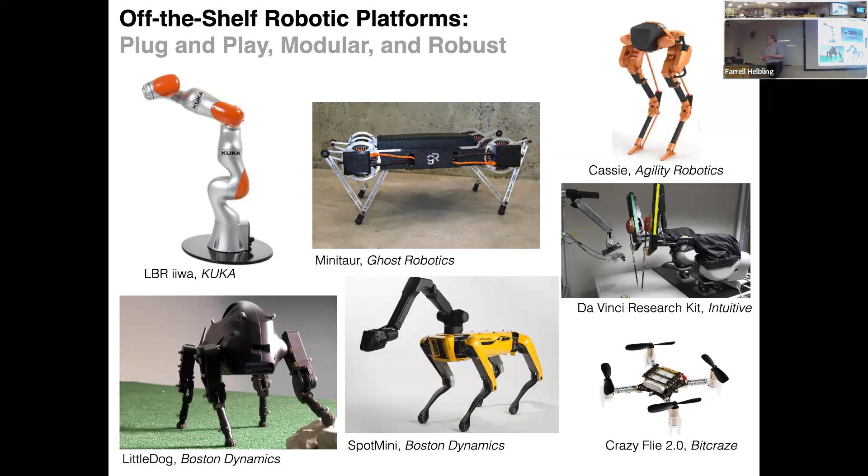What people have been doing for a number of years is looking at different locomotion strategies. If I do a 4-wing vehicle versus a 2-wing vehicle, how does that affect my locomotion? If I think about different actuation strategies, ionic propulsion versus low voltage electromagnetic, what are the implications for my power system design? You have to look at the entire stack when you're building something so small. Every single milligram that you put on these platforms is basically a question of, are you going to be able to fly or not?

So I build autonomous micro-robotic platforms that span a lot of different areas, some of which I cover, some of which I do not.

Some of the main things that I think about in my lab are micro and mesoscale manufacturing. How do we actually build the articulated mechanisms necessary to either flap our wings or move our legs? How can we think about power storage and amplification? I'll spend a lot of time talking about some of the power system design that I did to make RoboBee untethered.

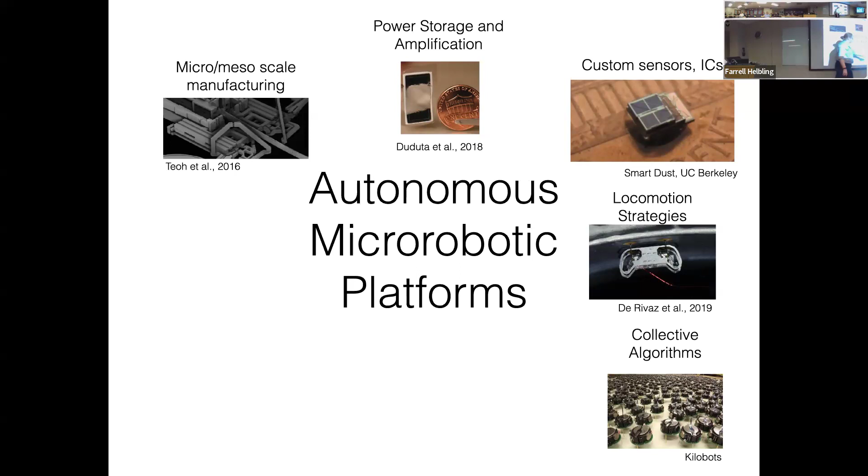We can also use them as platforms for biological study, because you don't really want to put a bee inside of a tube and spin it around many times. What can we actually learn from some of these small scale systems?

We also do things with planning and estimation. How can you do it on a very low compute platform where you don't have an operating system? We don't have ROS on board. Everything I'm doing, I'm programming in C on a very small microelectronic microcontroller. And then finally thinking about system level optimization, because again, every milligram that I put on board is either going to determine, am I going to fly or not.

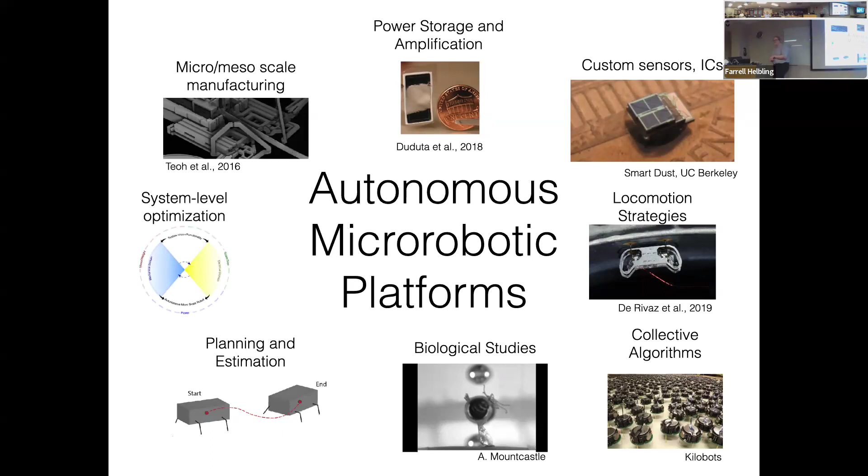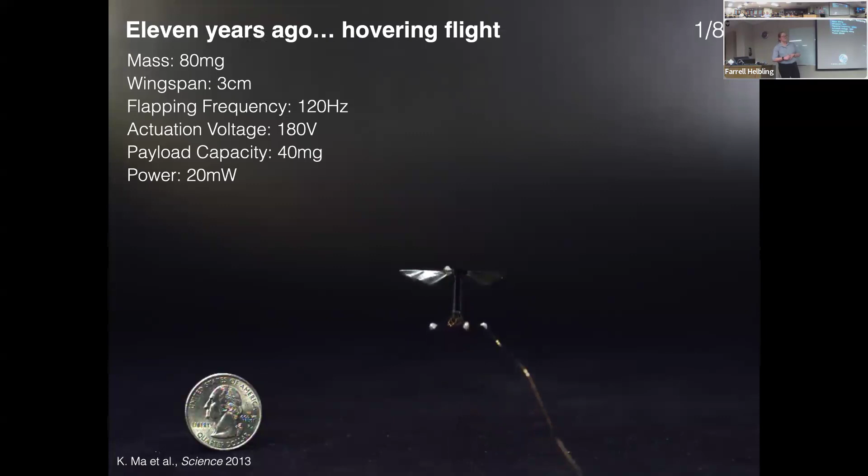So when I first joined Rob Wood's group at Harvard, they had just achieved hovering flight - this was 11 years ago. They had the RoboBee platform. Sorry, the video looks better over there than it does here.

But this tiny vehicle is 80 milligrams. In terms of scale, it takes about 32 of them to weigh a penny inside of your hand. It's a very lightweight vehicle. Back in 2013, it had a total payload capacity of about 40 milligrams, so you're thinking about like one 3-millimeter IMU that you can put on there and nothing else. This guy has a wingspan of about 3 centimeters. You can make the wings smaller and just flap it at a higher frequency, so I don't really like thinking about it in terms of that type of size scale.

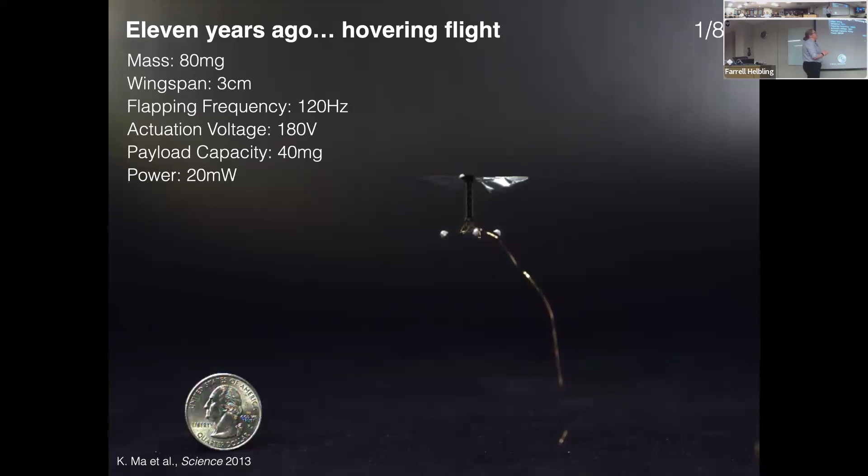For actuation, it flaps at about 180 volts and it consumes about 20 milliwatts of power - that's just the actuator, nothing else on board. This system is tethered.

What kind of sensors can I put on board the vehicle to allow it to sense different states? How can I change the design of the vehicle to carry more payload capacity without also increasing the amount of power that it was consuming? There was a lot of work that went on between the very first generation of the Bee to what we called Big Bee, and then we have RoboBee X-Wing, which I will talk about later in this talk.

And then different power strategies as well. So either thinking about custom battery solutions, off-the-shelf solar cells that we can buy pretty cheaply, and then step-up converters.

I'm going to talk a little bit about the sensing work that I did, but for the sake of time, I'm not going to spend too much time on that area. I'll get pretty in depth into power because that paper came out in 2019 and then we had a pandemic, and so I don't get to talk about it very often. So I'm going to talk a little bit about that as well. And then I'm going to get into some really cool and interesting locomotion strategies and opportunities that we can do at this scale.

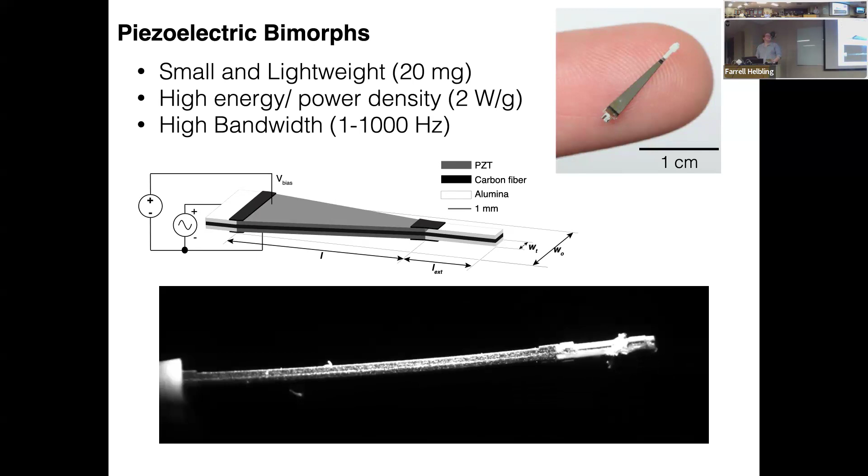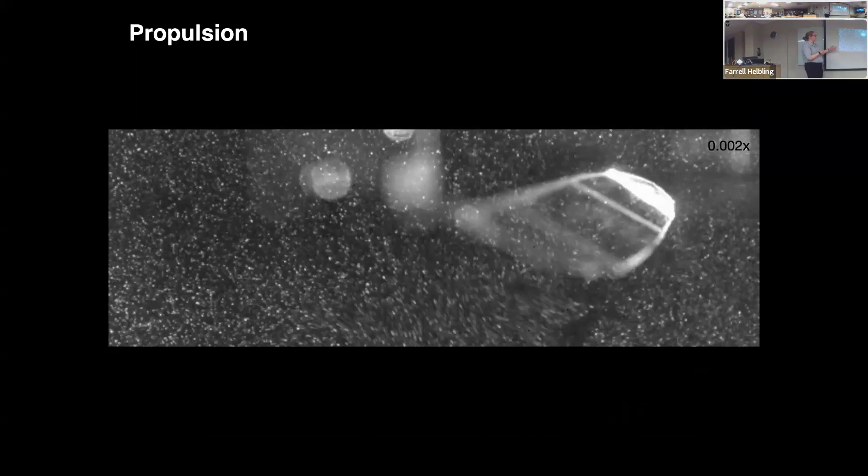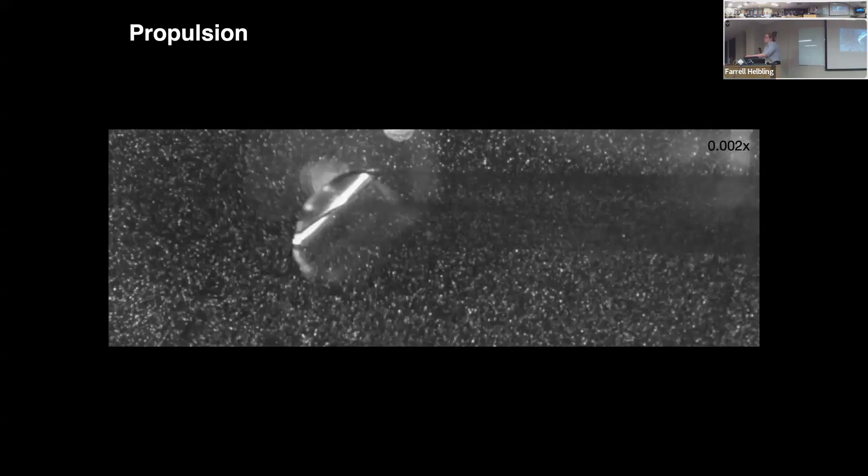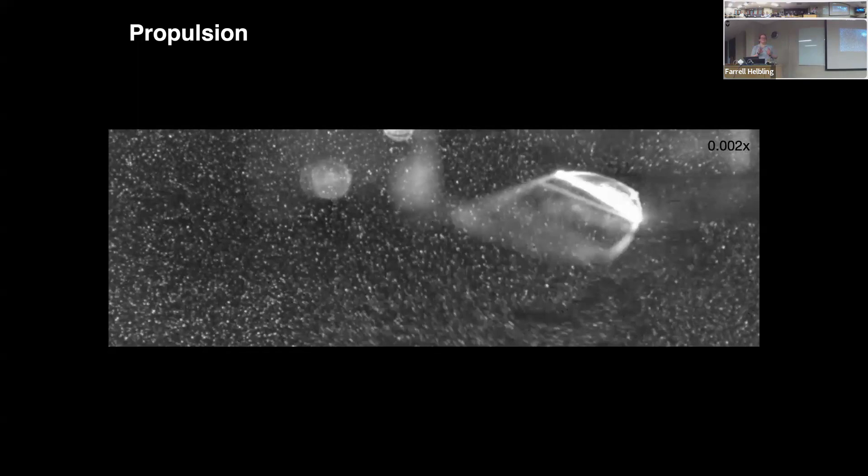We then did a lot to study the propulsion strategies. So what are the different wing sizes, the wing shapes that we need to actually generate the vortices, shed them, and generate the lift capacity for the vehicle. A lot of work went into the vehicle design to actually increase our overall payload capacity. You can make improvements in the wings, but the overall benefit of wing improvement is significantly smaller than changes to your actuator, et cetera.

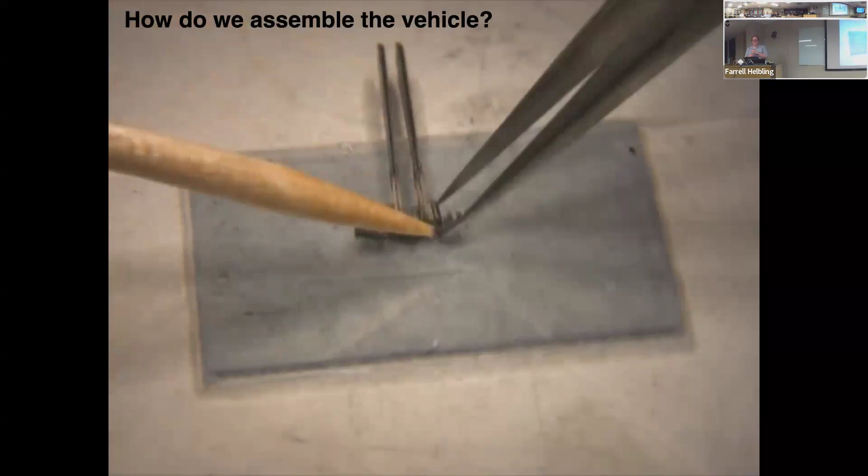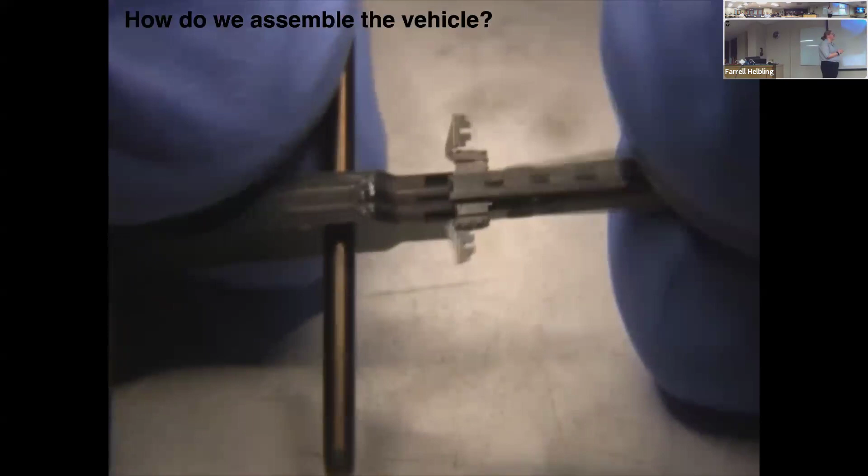Okay, my favorite part is actually assembling the vehicle. We do this under a microscope with tweezers and glue. My students hate it, and that's okay because I will do it, or I will at least step in while they're trying to learn this process. Some of these things we can combine.

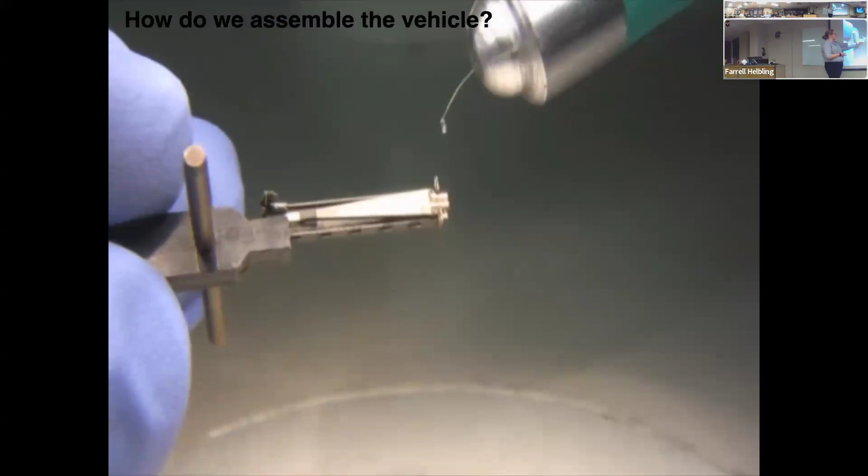So there is the pop-up book method that was developed in Rob's lab in 2012, but while we're iterating through different designs, I kind of like having it more modular. When you're building a pop-up, a lot of things have to be pre-designed inside the scaffold, and so you actually can't swap things out as easily. So everything is done under a microscope using tweezers, and then we apply very fine coats of glue and epoxy to make sure that everything stays exactly where it needs to.

Once this is assembled, we then test it. As I said, each wing is powered by a single actuator, so we can flap them at different frequencies. We very rarely do this. We can flap them at different amplitudes. And in this way, we can generate the torques necessary to controllably fly.

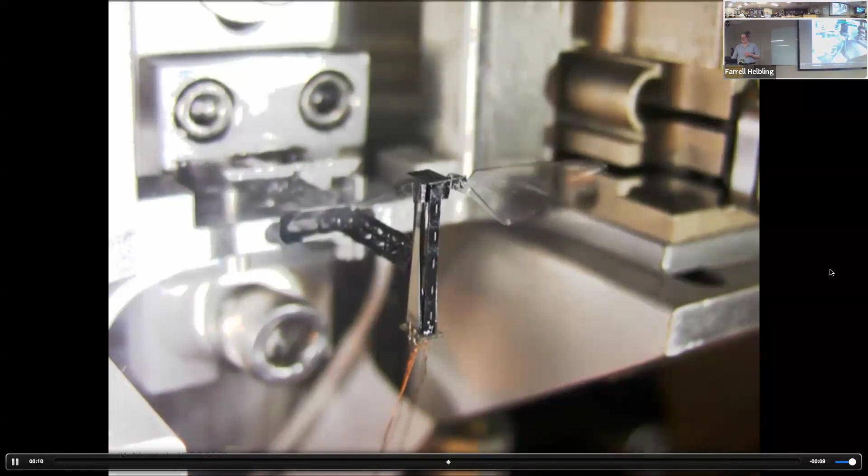Do you need me to admit this person in the waiting room? No, no. Perfect. I think I got rid of it. Don't know how to get rid of this though, guys. I'm sorry. That thing is going to live.

So how do we actually control the motion of the vehicle? Like I said, we can vary the frequency and we can also vary the amplitude that is provided to each wing. Okay, so in order to control pitch dynamics, we just change the mean position of the wing either forward or backward, and that just tips my body forward or back. Like even as I'm telling you this, right? My body naturally wants to move forward or backward. Roll, we just flap one wing at a larger amplitude than the other.

That causes asymmetric forces. Yaw control, you actually can't do this at resonance. You have to move further away from resonance. Resonance will actually filter out this split-cycle signal. But what you do is you just flap one wing forward faster than the downbeat, and then on the opposite side, you do the opposite. So you would flap up very slowly and then quickly on the backside. You can do this in a pool if you are just hanging out in a pool and you want to spin around really fast, test it out. It actually works. But again, this can't happen around resonance. This is a second order effect, which gets filtered out by our system.

Do you know if actual bees flap at resonance? Oh, that's an interesting question. I'm not sure. I mean, there would be a lot of energy savings around flapping at resonance, so I imagine they would want to. But I don't know. They also don't necessarily have the same type of flapping control here. They have one big power muscle and then small control actuators on the side to change the angle of attack of the wings. We can do that. It's just significantly more complex to build and not as repeatable.

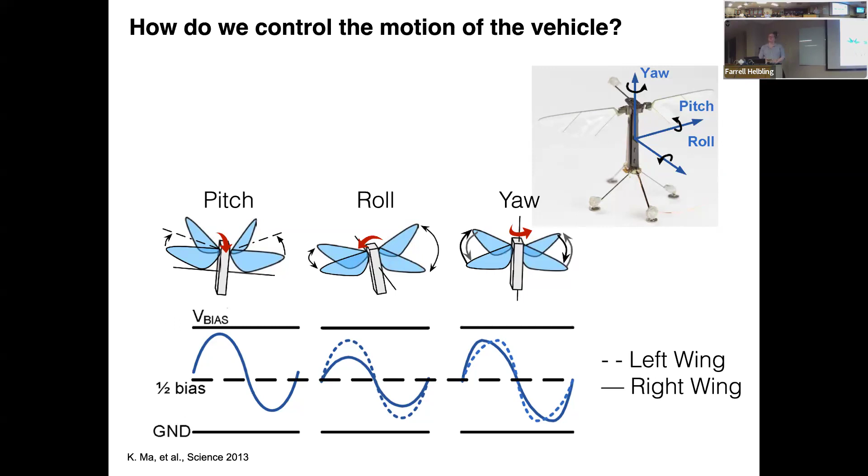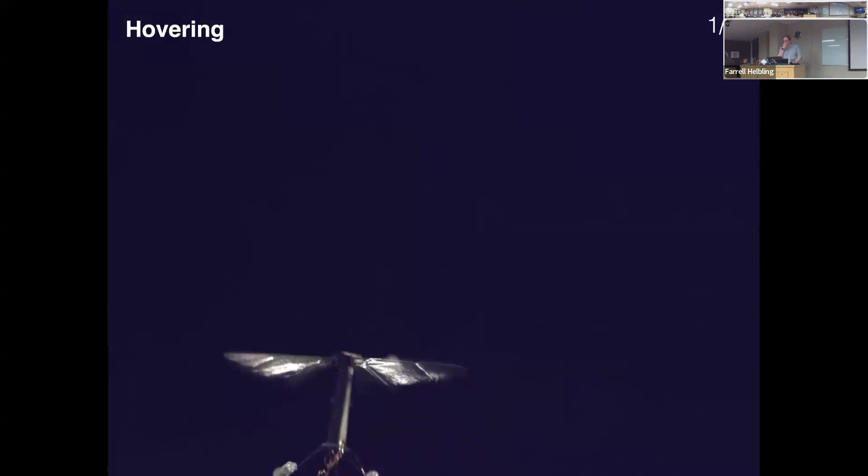Okay, so we build it, but because everything is built by hand, you have all these open loop effects where it's just gonna crash into the ground, okay? And so we keep trying to tune the parameters until we get that kind of straight up and down flight. At that point, we're kind of like, okay, we've tuned out all of our biases. Once we have that, we wrap a controller around it.

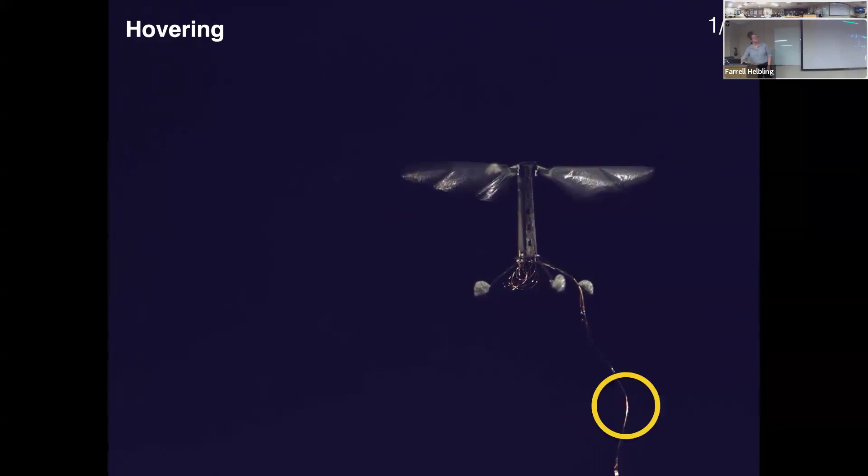So again, we have these motion capture markers that are constantly tracking the position and orientation of the vehicle. And then we have this onboard tether here, which is sending control signals and also power to the actuators, okay? So all of this is still trapped inside the motion capture.

Do the motion capture tags have any significant drag in the system? Does the tether have drag? Do the tags make any drag? Oh, no. And the tether, honestly, I think would probably have more of an effect. But we did a lot of studies where we actually just kind of dragged the tether under the vehicle, and so the controller can kind of compensate for it. But it would be another thing that I don't have to worry about if it was autonomous.

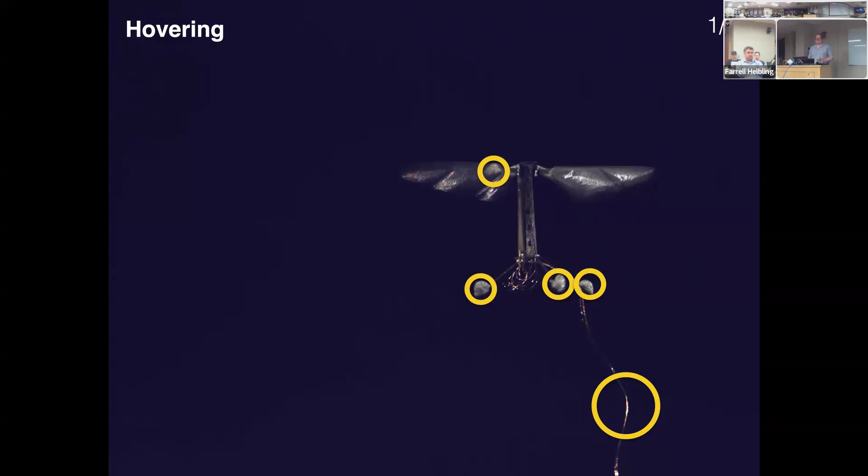Question about that. So the time constants here must be tiny, and so I imagine latency in your sensing, or even the frame rate of your sensing, are pretty important. What were those approximately? So the Vicon system is somewhere around 500 hertz and it has about 20 millisecond latency, which is not excellent, but it was perfectly adequate for some of the control work that we were doing here.

The sensors that I can buy off the shelf are providing feedback significantly faster than what my Vicon cameras can do. Obviously, they're not going to be as precise, and so they're going to start accumulating error, and that's something that I had to deal with.

But you can do control at 20 milliseconds of lag? Yeah. You absolutely can, especially for something like hovering where you just want to stay in place. And then if we want to do any type of fast movement through the environment, we split it into multiple hovering waypoints where it's just hover, hover, hover, and then it just moves into that position, either by pitching or rolling.

Okay, so everything exists inside of this motion capture arena. And then just for scale, this is the bee down here. This is actually an image from the Vicon arena that I had during my PhD, but I built an exact identical version at Cornell, so the images would look exactly the same. I just didn't take another photo.

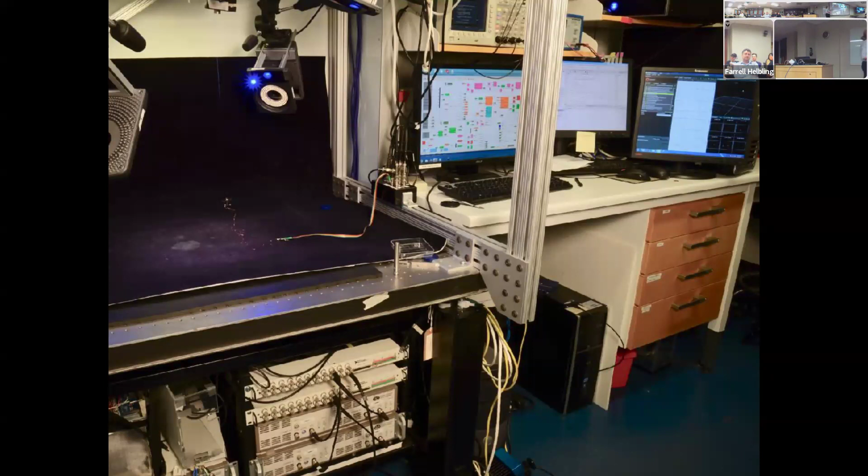Basically, this is all of the equipment that is required to fly RoboBee. And this is one of the real limiting factors of why we can't provide other people the capabilities of using it. We can step through the whole thing. So we have our motion tracking system, which is providing position and orientation information. That is being sent to this off-board controller, which is creating the actual Vicon object. It is sending position and orientation information to our control computer.

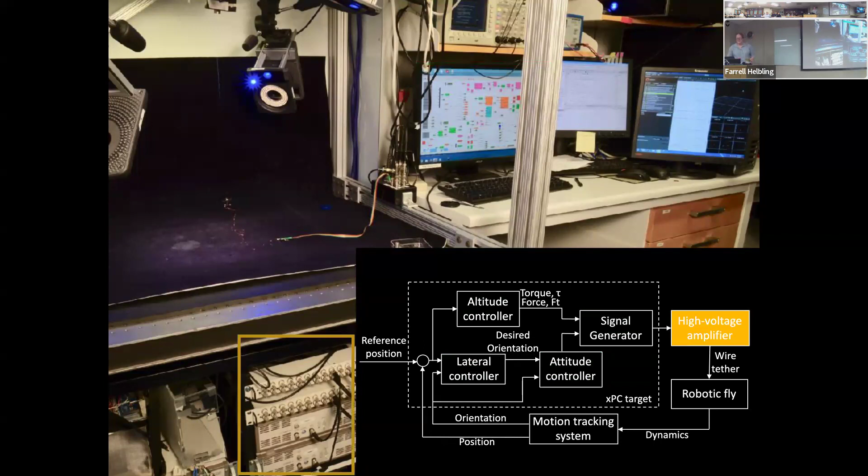Within our control computer, we have an altitude controller, a lateral controller, and an attitude controller, so we can determine our desired orientation. And then that also computes the signals that we want to send to the actuator. Again, because it's coming from the computer, it is very low voltage, somewhere between 3 and 5 volts. So everything gets stepped up through a high voltage amplification system down here to about 200 volts necessary to fly the bee. All of that gets flown directly through this very fine wire tether to the bee.

So if we actually look at some of these challenges, first we're going to think about sensing. Our current sensing system is off-board motion capture. It records 3 axes of position, 3 axes of orientation. It provides feedback at about 500 hertz. We have thought about how quickly we actually need to do this, and so we will subsample Vicon down to give us the minimum feedback necessary. But again, everything we get off the shelf is doing well more than 500 hertz, so that's okay. And a latency of about 20 milliseconds. We used to joke around and say that this is like training wheels for the RoboBee.

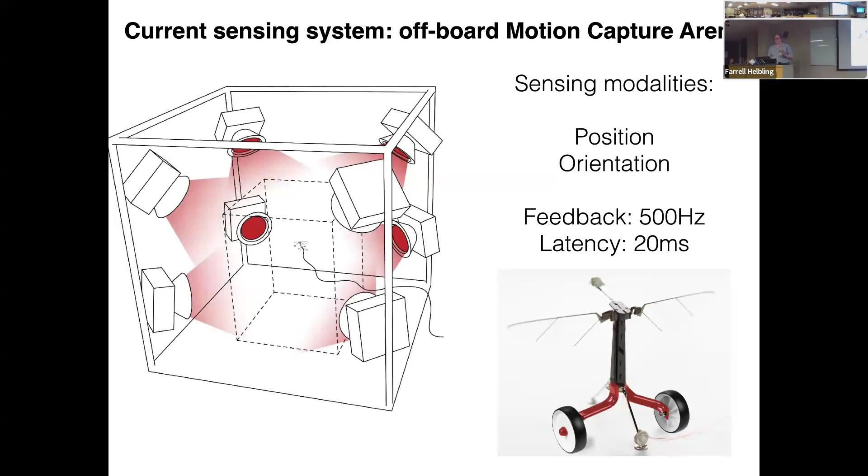So inside of our control architecture, we have our motion tracking system. With the original vehicle, what we wanted, and I don't know how to get rid of this, I'm so sorry, is a payload capacity of about 10 milligrams of sensor. We can do different sensor combinations, but we are really looking for very small sensors that we can put on board the vehicle. And the more sensory information we have, the better.

Again, the wingspan is about 3 centimeters. That is going to dictate how small of a sensor we can actually put on board. This top cap up here is about 1 millimeter by 3 millimeters. So if I even just put a 3 millimeter IMU on top, that looks like a very funny hat that sits on board. Flapping frequency is about 150 hertz, so this is going to add repetitive noise into the system. You can see it in the accelerometer and the gyroscope data that we have.

This power number is very optimistic, where we would like it to be less than 5 milliwatts, because again, RoboBee cannot carry a battery up to this point. It can carry onboard solar cells, but everything that is statically not providing propulsion is just something that is going to eat power out of our system.

Attitude bandwidth is somewhere around 100 hertz, so we can affect changes in attitude at about 100 hertz. Lateral bandwidth, significantly slower. Okay, so I can get significantly slower sensors for altitude and for lateral dynamics than I need to actually stabilize my upright orientation.

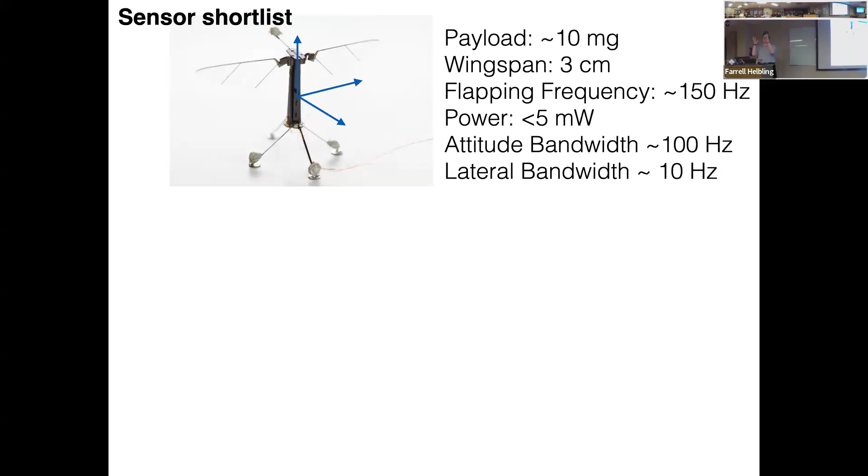So I did a sensor survey of things that we can buy off the shelf and things that we can just put on board custom. So insects use ocelli. These are light sensors. They're sun compasses that sit on top of bees. They have 3 sensors that sit in a triangular pattern. This was using 4 photodiodes, sorry, across 2 major axes. And just by measuring the difference in light intensity between these axes, you can get full orientation of the vehicle.

You can also buy off-the-shelf IMUs. You can buy magnetometers. This was, I think, the very first conference paper I worked on, and I thought I was so smart by soldering directly onto the sensor instead of putting it on a PCB. This is very silly. I don't recommend. But I think that the first conference paper you actually do, you don't realize how silly some of the stuff you're doing is. But yes, that's what I did. I thought it was very smart.

Also thought about proximity detection. So proximity sensors, you can either measure the amount of intensity that you see with your photodiode, but you also have time of flight sensing, right? Where you can measure the amount of time that it takes for a light source to come back. They both weigh approximately the same amount. They're about 20 milligrams. Optic flow is just a very low resolution camera that is detecting the velocity of known patterns in the environment.

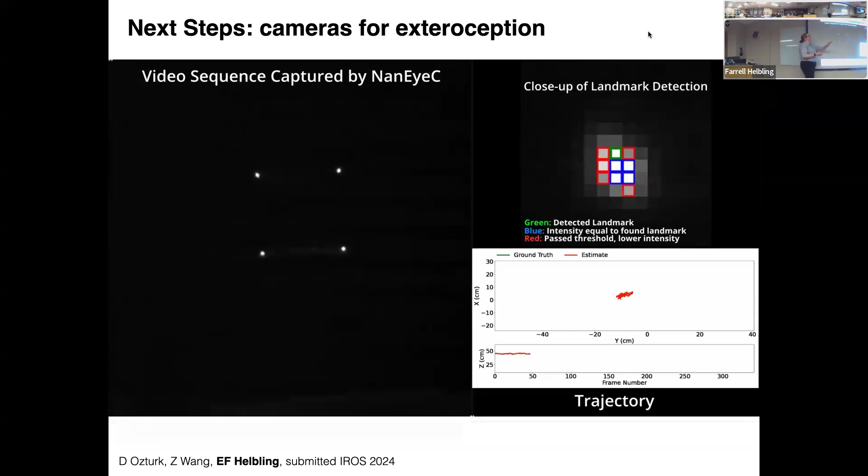This was just submitted, so I'm not going to get into it too much, but we have four lights inside of our environment — these are just LEDs, there's nothing special about them. We waved the camera and the microcontroller around the arena in a figure-8 pattern while also changing the height of the system.

You can see there is some noise in our estimate, but you can get full orientation and position information at about 17 frames per second. It's a little bit slower than what we would want for a RoboBee platform, but it could also be used as a secondary sensing system for a high-speed IMU or provide additional feedback on board. This is all being done on the microcontroller — there isn't any additional compute happening on board. So we're very excited about this result.

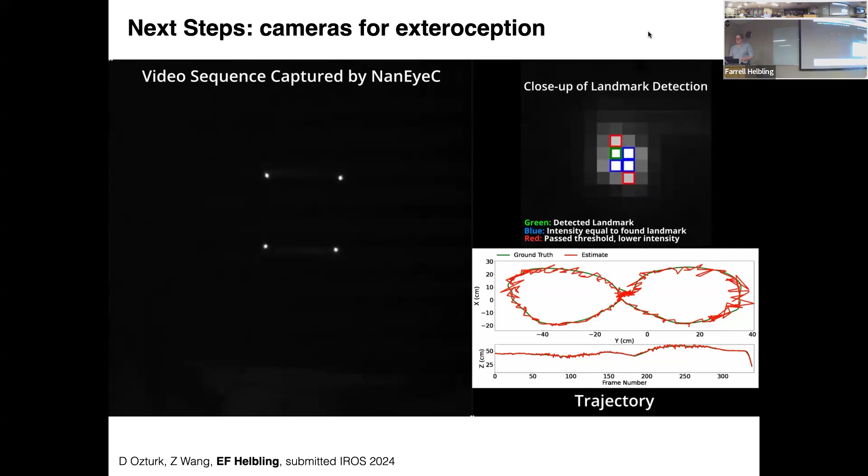So that's kind of what I did in the sensing realm. I was on a lot of different papers from other people, but for the sake of time, I'm going to transition pretty quick into power, because I think that result is just significantly more fun.

So in 2013, when the original Bee took off, it could carry 40 milligrams of payload. This is not enough for any onboard power system that we want to put on. The smallest LiPo battery I can buy is 330 milligrams — five times the weight of my vehicle — and that doesn't include any of the step-up components I need. So how can we actually increase the thrust of the vehicle?

We want to increase thrust, but we don't want to significantly increase the weight of the vehicle, and we don't want to increase the overall power consumption either, because that will also have implications for whatever power system I put on board.

So we increased the actuator and transmission stiffness, which led to a pronounced resonance inside the system. We had a new operating condition of about 190 volts and 170 hertz. The overall load was 28 milliwatts, increased from 20, but it could lift 170 milligrams compared to the original 40.

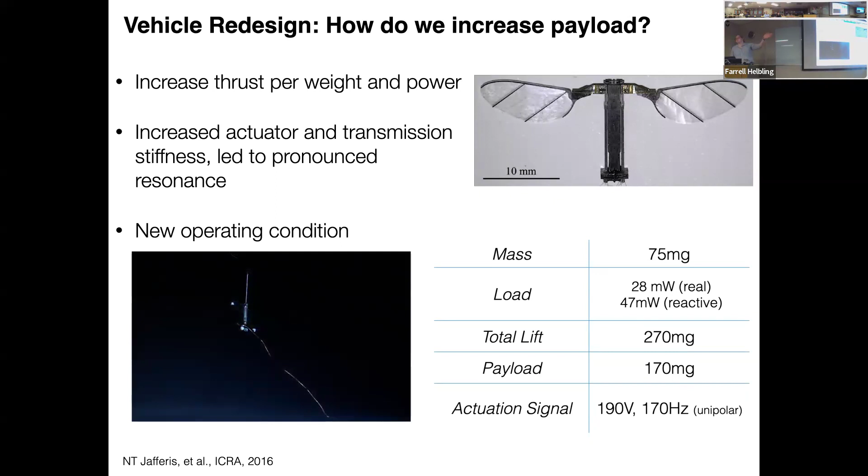This was work done by Noah Jafferis, who eventually was a co-author on the Nature paper I'm going to talk about. You can't see this, but it has a very, very small wingspan here, and just to hover, it doesn't take a lot of energy to do so.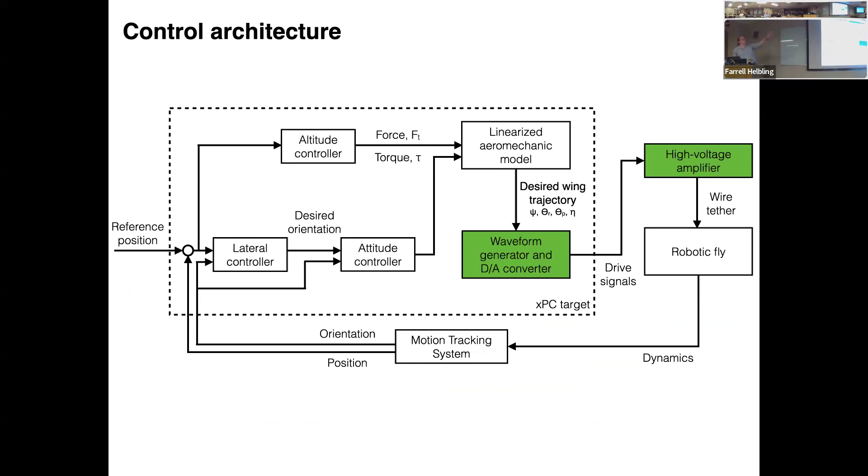So now instead of talking about systems, we're just going to talk about how do I generate a waveform and how do I step up that signal. We use these piezoelectric actuators, these PZT bimorphs, and we want to generate a high voltage time varying signal.

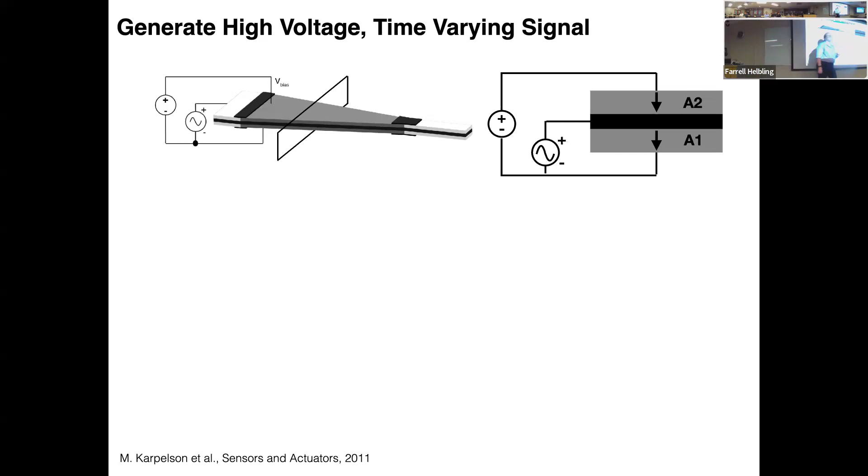Same thing, just a different picture. PZT bimorph just means you have a layer of PZT, a conductive layer in the center, which here is carbon fiber, and then a bottom layer of PZT. This bottom layer is charged to ground, the top layer is charged to some bias voltage, and the central layer is our time varying sine wave.

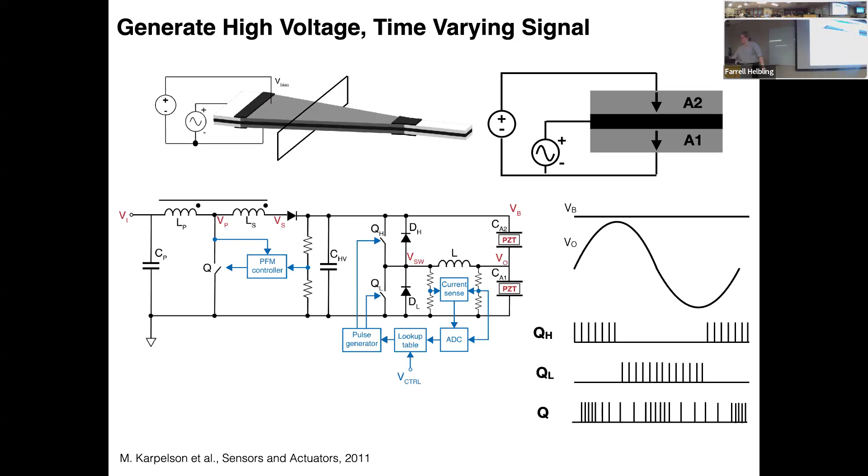Karpelson in 2011 wrote a paper about how you can actually do this at small scales. This is a tapped inductor boost converter with a half bridge switching stage on the other side. He estimated the mass would be about 100 milligrams and the input power would be about 100 milliwatts for a 20 milliwatt vehicle.

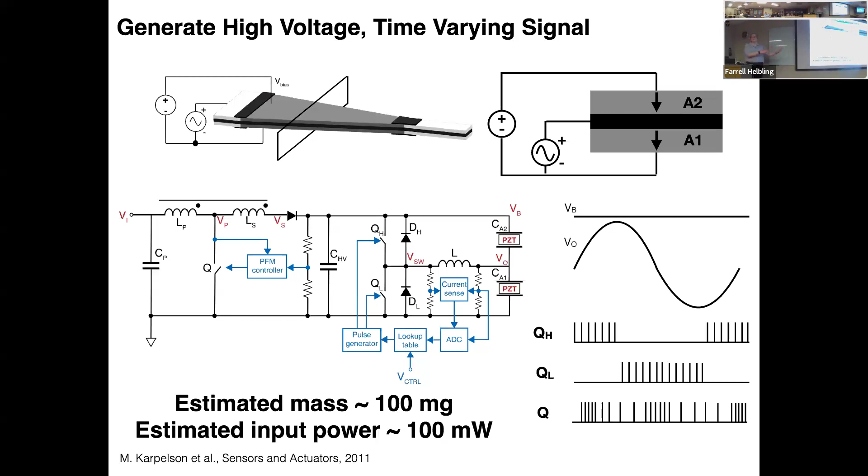So I said, we're gonna start here. Let me actually build what he suggested. Before I did that, I also thought about what our power options were.

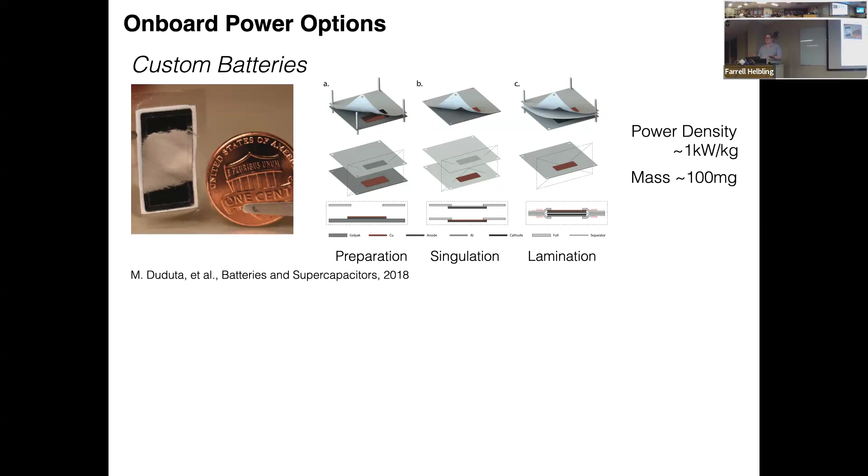I worked a little bit with somebody in the lab on custom batteries, very thin scale. When they were in their full housing and we were testing them, they showed a power density of about 1 kilowatt per kilogram and a mass of about 100 milligrams. But as soon as we actually got them down to that mass, they could no longer deliver that power density. I do not understand enough about battery chemistry to explain what was happening, but this was not a feasible option.

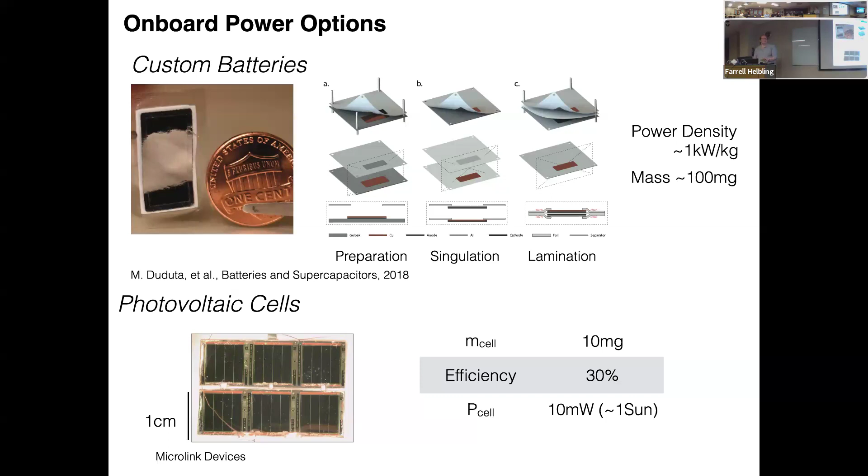So we moved into photovoltaics. Each of these cells weighs approximately 10 milligrams, has an overall efficiency of about 30%, and each cell can provide 10 milliwatts of power under one sun. One sun, not in Australia, but like on a general sunny day here, is about 1,000 watts per meter squared.

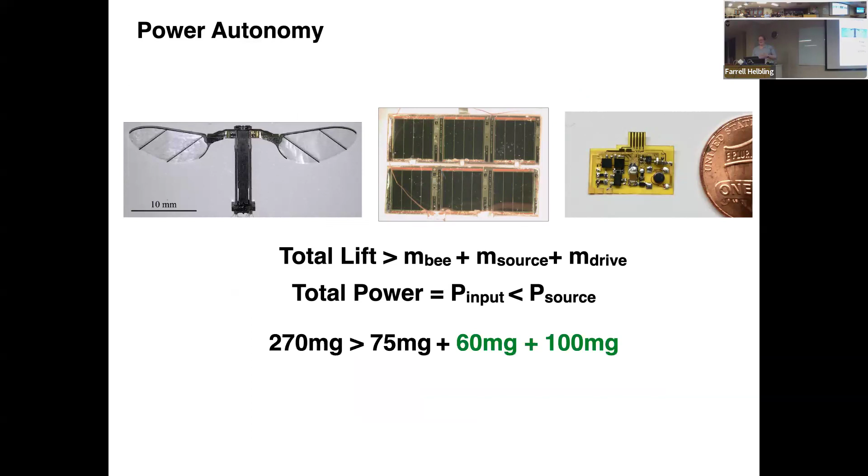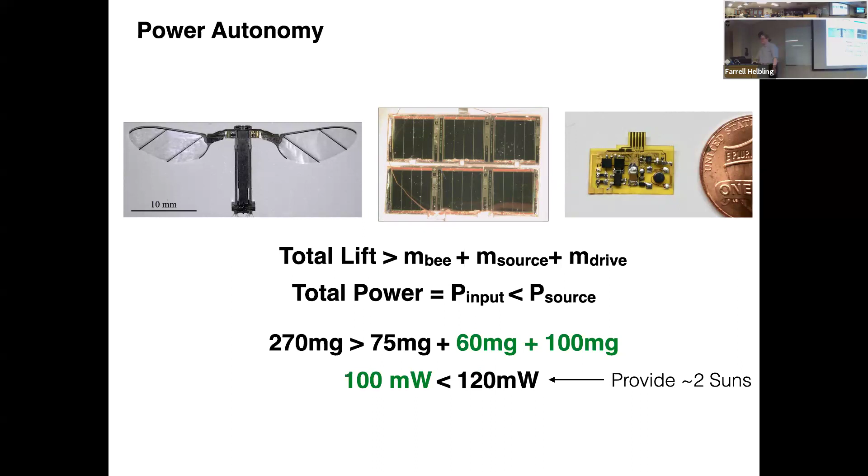So very simple equations for power autonomy: the total lift of your vehicle has to be more than the static payload of the bee, your source, and your drive stage. Your total power has to be less than whatever power your source can provide. So I did this quick calculation: if this is 100 milligrams and I have 60 milligrams of solar cells, the mass calculation works, but what it means is that I now need to provide 2 suns in order to take off. That's the only way my power budget is going to work.

So I built these in discrete components. I made the Flex PCB in-house, we have an LPKF, it's very easy to do. When I did this, my mass was nowhere near 100 milligrams, it was 185 milligrams, and most of that was just to stabilize the voltage coming in from the solar cells. We had 20 milligrams of capacitors just sitting here, and I started stacking them like a leaning tower of Pisa to try and stabilize my voltage at the lowest mass possible.

My input power also was more than what I anticipated, about 150 milliwatts compared to the 100. Most of this was because the microcontroller unit was pulling 30 milliwatts of power, mostly because we were running the clock at significantly high speeds to flip the transistors very quickly. When you run microcontrollers, the current consumption is based on your megahertz of clock rate.

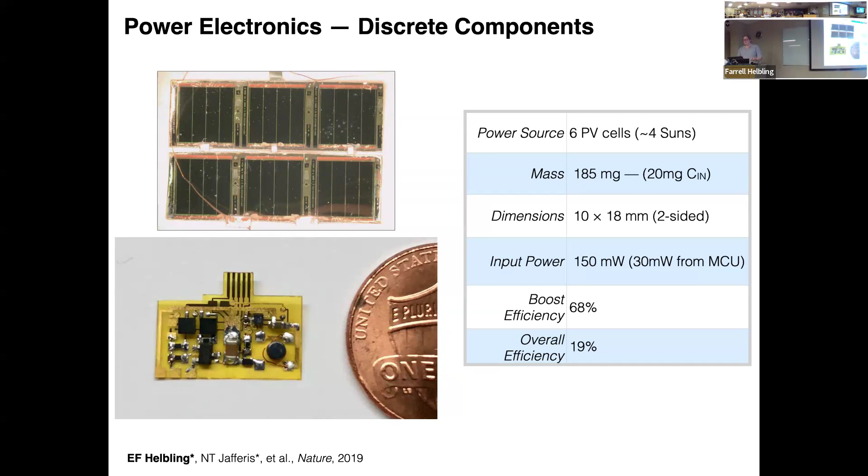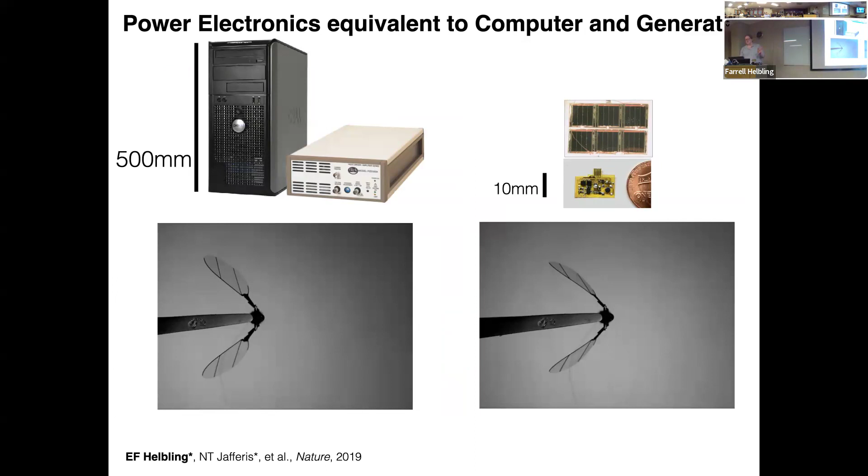What we showed was that our flapping kinematics are exactly the same, so in theory this would work. We just could not take off. It's 25 milligrams over our mass budget. So how do we actually generate a high voltage time varying signal with lower mass?

You can do it using different boost converter topologies. If I have a unimorph, I can simplify the number of components I need in this switching state, and I can just have 2 signals I need, QL and QH. But I have a bimorph, okay?

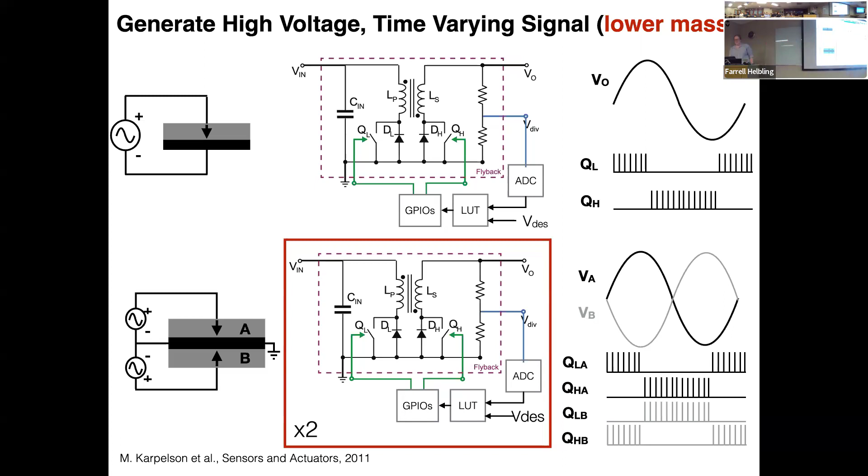And so I would have to take that and double it. We could absolutely do that, and in order to get that, we just run these 2 plates out of phase with each other. The problem is that because I don't have an alternating drive strategy, I had to basically adapt the work that Karpelson had done in 2011.

Because we want to prevent depoling of our actuators, VA, the voltage that I apply to A, always needs to be greater than the voltage that I apply to B, okay? This isn't too much of a difference. So instead of running these 2 waveforms out of phase, VA is constantly getting this signal. VB is either clamped or it's just passively following the voltage of VA.

So we had this additional QS, which basically clamped the voltage of VB, the base. But we had 2 flyback converters. Flybacks are what the topology was on the previous slide. We had an additional clamp that shut off this bottom plate of the PZT actuator. And so we were able to build this system and only send 1 signal to 2 actuators.

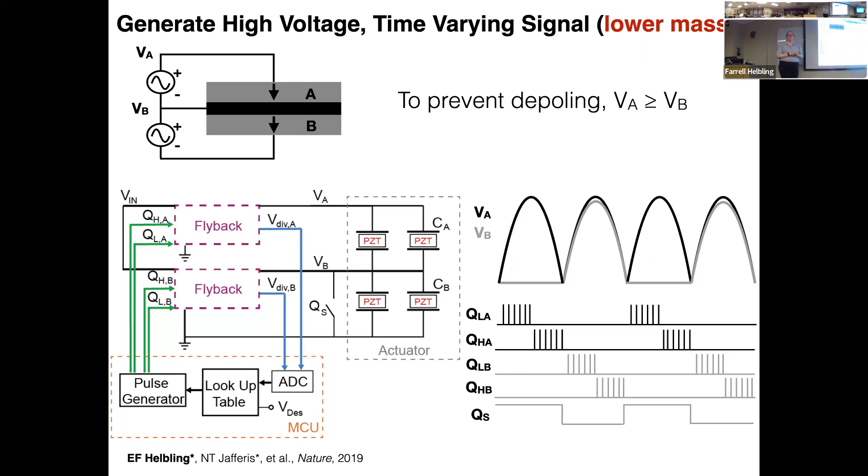So I could get it to take off, but I can't actually controllably fly untethered. I'm going to show you a video that I still think is very cool, but no, I cannot control its flight. It will take off, but that is it.

So I created a new drive signal, and I also greatly simplified the switching strategy, so I could use a simpler microcontroller than what I had. Before, I would have needed 4 suns to power 150 milliwatts. Now I just need 2.5. I reduced my mass by 30 milligrams. My dimensions were a little bit larger, but my overall power consumption reduced from 150 to 110 milliwatts, and my overall efficiency also improved.

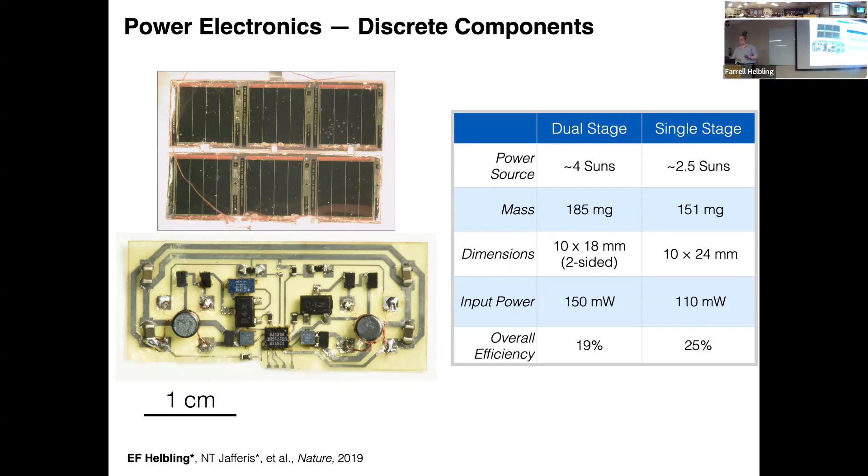At the cost of not being able to generate multiple signals to the vehicle. The waveform did not look the prettiest, but if you actually just looked at the FFT, we were pretty spot on compared to what we were actually generating with clean sine waves.

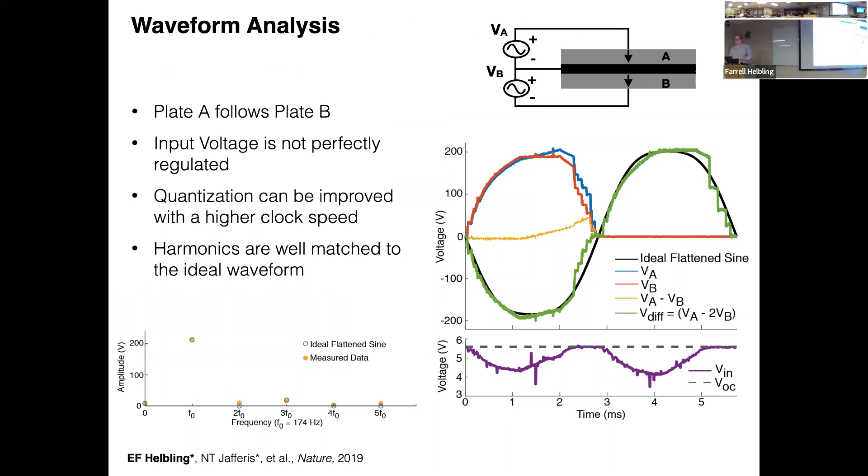So we developed this first untethered flight, and I watched this video probably for 15 minutes to be like, did it take off? And it goes up a little bit here, and we could not agree on whether or not the tether actually pulled it up or not.

And the person that I was working with, who was working on the vehicle design, was like, you got to get this to be even smaller. And I was like, absolutely not. I've already saved 30 milligrams. I have shaved off 40 milliwatts of power. We have to look at a vehicle redesign.

So we created the RoboBee X-Wing, which had a new actuator design, which increased our force. But by increasing force, you also linearly increase your power. So what we wanted to do was just decrease our wing velocity. The way that we did that was we just went from 2 wings to 4 wings.

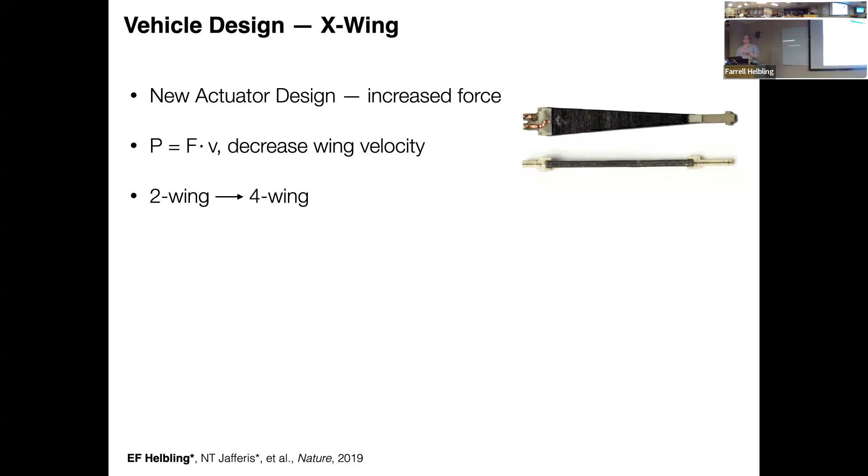So each actuator now just passively controls these 2 wings. These 2 wings just follow each other. There's nothing going out of sync. We're not doing clap and fling. This is just moving in one direction.

So the mass of the system is 90 milligrams. It did not change the overall load. We're still at 28 milliwatts. Now my total payload capacity moved from 170 milligrams to 215 milligrams for the exact same actuation signal.

So the board here, the signal generator, is sitting below it so that we can match the center of pressure to the center of mass. This allows us to get these straight up and down flights. And then our solar array is spaced so far away from the bee just to prevent any type of ceiling effect onboard. The other thing that we could do is just create a ring around the wings, which would have provided the same thing. So this was actually our first untethered flight.

So in real time, it looks like this. When you slow it down, as soon as I turn the lights on, the energy provided by the solar cells turns on our generator here on the bottom. And I immediately start sending signals to the vehicle. As the power starts ramping up on the lights, because there's a delayed effect, you get this slow increase, and then it will actually take off for many, many body lengths. And it could do this repeatedly. We had a tether on board for safety, so it would go up into the light and fall back down. We could do it over and over again.

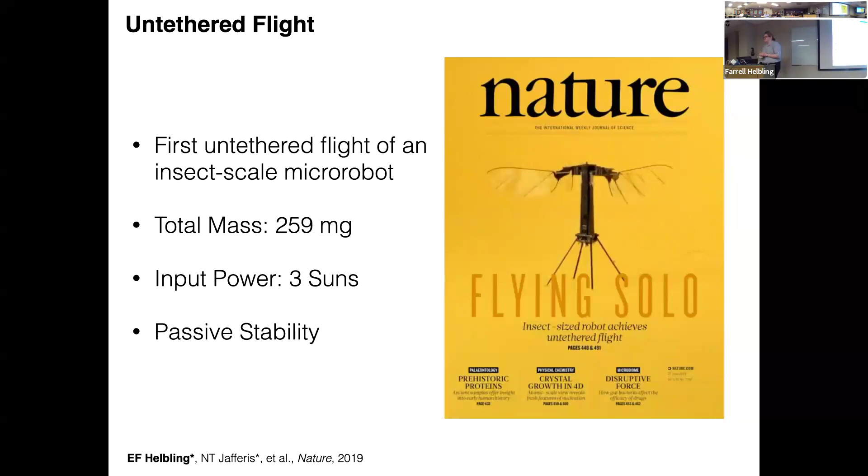Thinking about different ways of going outside, you can improve actuator efficiency. You can also improve the overall voltage by just using multi-layer actuators. This is something we're actually working on in the lab right now, moving from 200 volts to 100 volts. And then thinking about a new vehicle design to increase the capacity, one way I've currently gotten around this is thinking about new locomotion strategies.

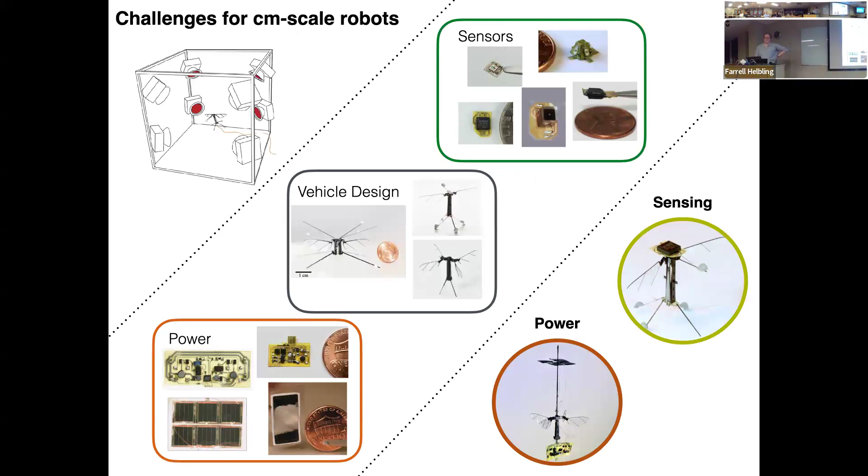So we have a lot of challenges for centimeter scale robots, but we also have really interesting opportunities in insect scale systems because of the size. We have impulsive locomotion strategies. This is something I've been working on with Rob Shepherd and Cam Aubin, who's now a professor at Michigan. You can get these really nice combustion actuators to do jumping or kind of scuttling across the surface.

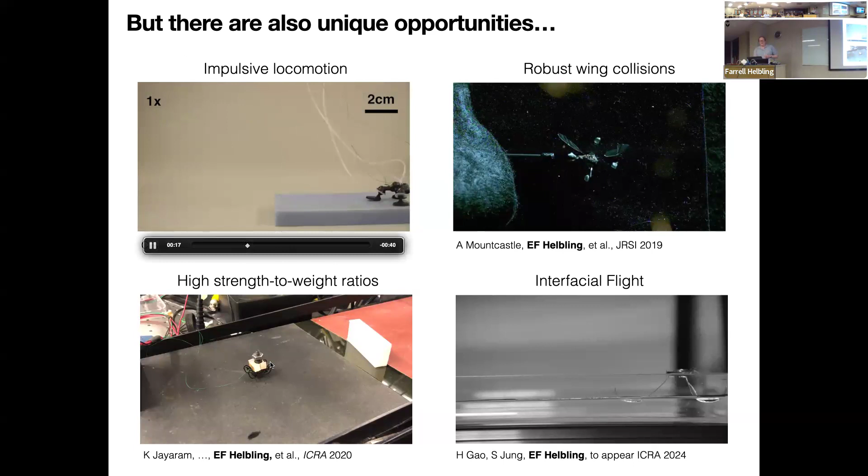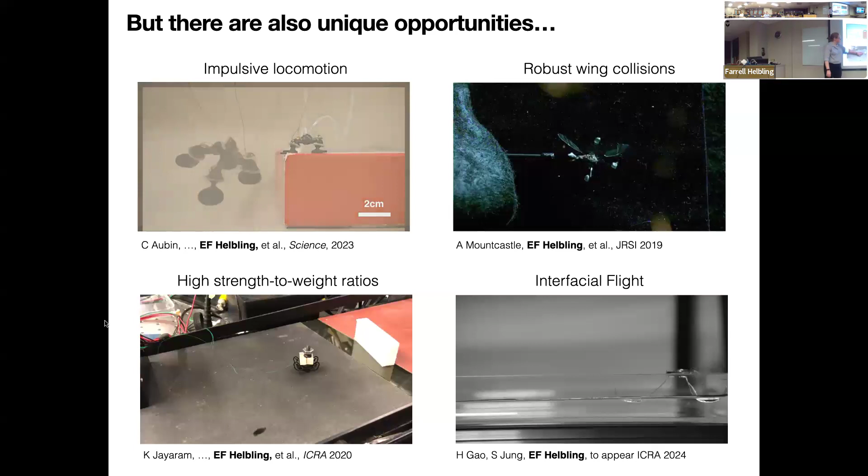You can also have high strength to weight ratios. This is some of the work I did on the HAMR system that I now have new crawling systems that have not yet been published in my lab. This is a 400 milligram system, but it can carry up to 3 grams on board. The force actually being provided by the actuator is exactly the same as the HAMR system, it's just half the size. I'm gonna pause this.

On the impulsive locomotion side, you're really looking a lot at power and energy, and there's always this debate, and there's been a few science papers on the efficiencies of hopping or surfacing across water with flying fishes, etc. Do you have any insights into power efficiency over land or water based on your very detailed calculations here?

So one of the interesting things about impulsive strategies is that you don't have the time function. A lot of power is being sunk into microcontrollers that are computing real time power metrics or actuation signals. You don't need that with impulsive strategies, which is really nice. It's not necessarily the best way of traversing a space, but because you can slowly provide power for a very quick burst of energy, depending on the actual design of the actuator, it could be more power efficient than what we're thinking of.

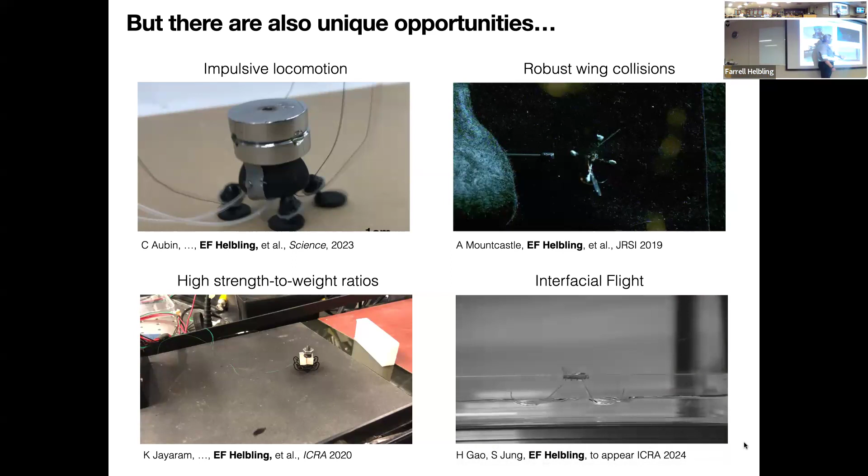We can also collide with things really easily because we are low mass. One new robot I'm working on in my lab is this interfacial flyer. Taking something very similar to RoboBee, putting 3 of these passive legs on the water surface and allowing it to skate across the water. I like this platform because you can separate the thrust problem from your payload problem. Your payload problem is now completely dependent on the size of your legs, and your thrust will just dictate your speed across the water.

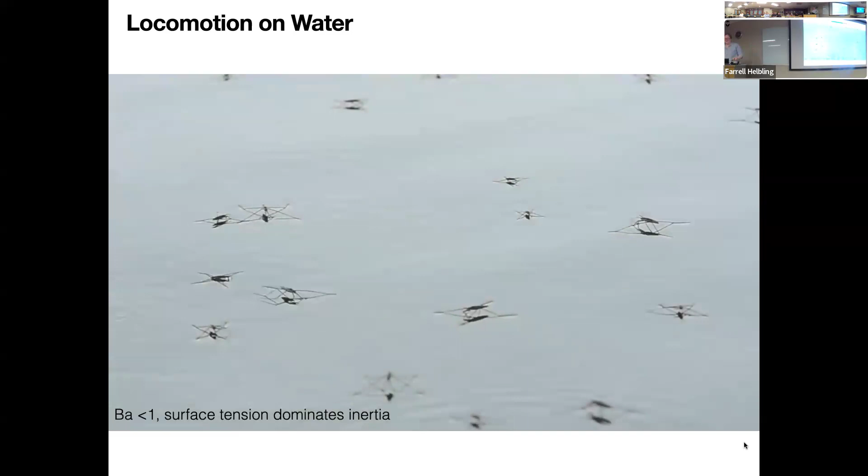Just for the sake of time, we've all seen water striders. We know that they work across the water surface. Importantly, if your Bond number is less than 1, then surface tension starts to dominate over your inertia, and you can stay trapped on the water surface.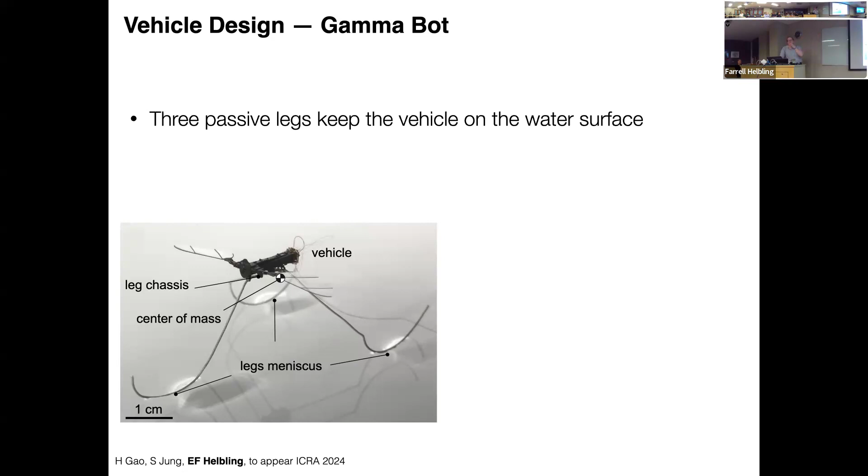So we have the Gamma Bot, a new vehicle. We have three passive legs that keep the vehicle on the water surface. Horizontal thrust is generated by the flapping wings. Total mass is about 112 milligrams. It can carry about 419 milligrams of payload capacity. So now we're getting into: could I carry a battery on board if I wanted to?

Here, the actuation signal is significantly less. We only flap at about 150 volts, and it can move up to 15 body lengths a second, or a meter a second, across the water surface.

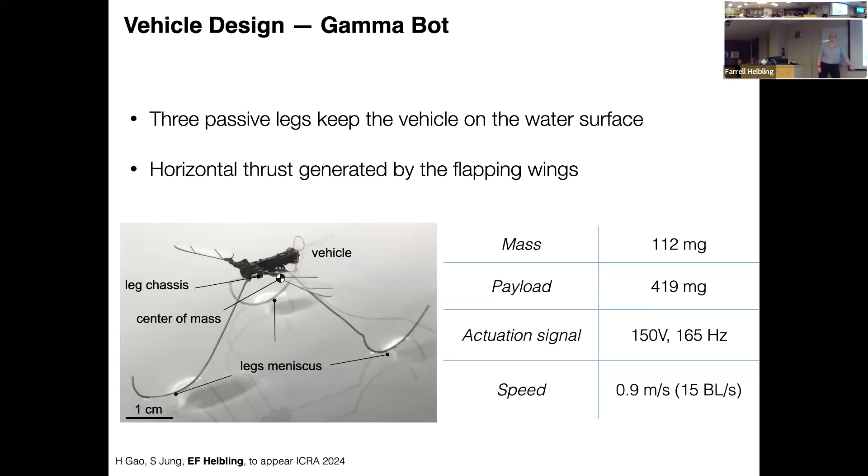Physics on the air-water interface: again, you have thrust force, drag forces on the leg, capillary forces, surface tension forces, and air drag on the body. Water drag, all these forces work on slowing the robot down. What we found was that water drag significantly dominates these forces by multiple orders of magnitude, providing significantly more force than capillary forces, surface tension, or even air drag on the system.

We looked at the different experimental performance, and we saw that our behavior very well matches our predictions. So these are just two little models we had when we had the signal completely going off, and we eliminated the air drag on the body.

Then when we had the signal on, we noticed a secondary increase in velocity happening. That was actually being generated because our front leg is generating a wake to the two back legs, creating a low pressure field in the back leg that's increasing the velocity past what we can model and predict. The wider we got our legs, the faster we could get this transition to happen.

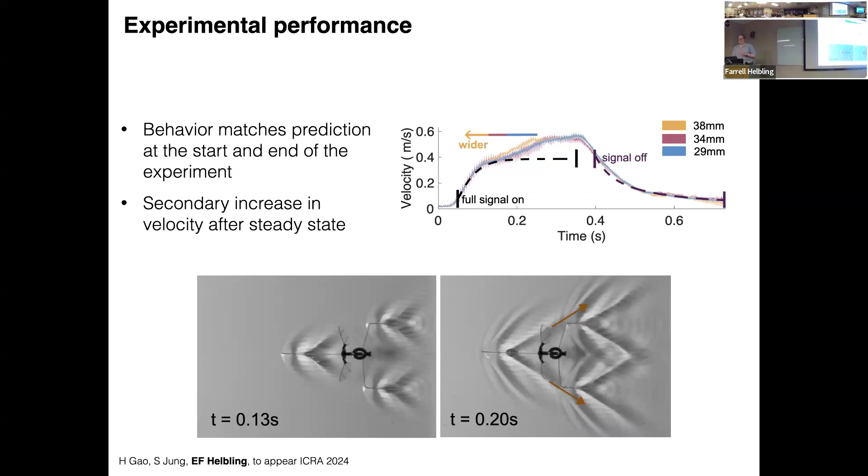In real time, it's moving at about a meter a second. This is slowed down to 0.04x. I like these videos because you can see the effect of the ripples on the water surface. This is still tethered, and I'm currently working on untethering it with my students.

We can also get it to turn left and right by providing asymmetric forces on the vehicle. We can get a left turn, and we can also get a right turn. I do find these lines to be mesmerizing.

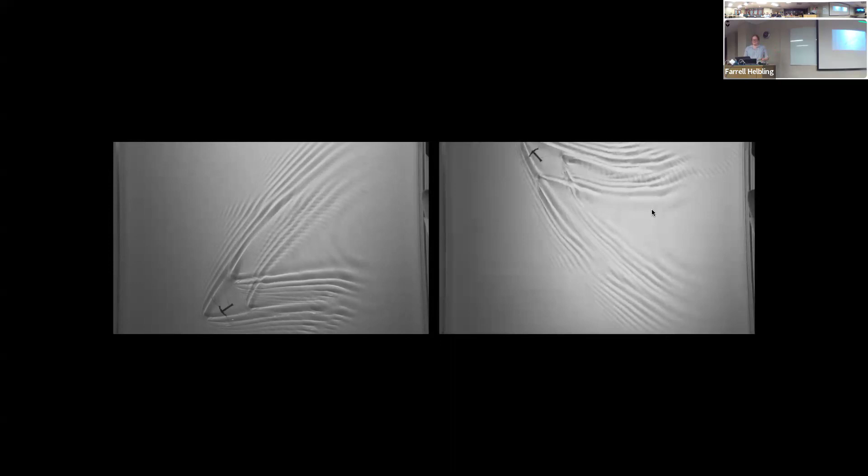In addition to untethered performance, we're also thinking a lot about these high frequency ripples we have here, and how we can embed communication strategies between multiple robots, or sense obstacles in our environment by thinking about these ripple patterns that are being generated.

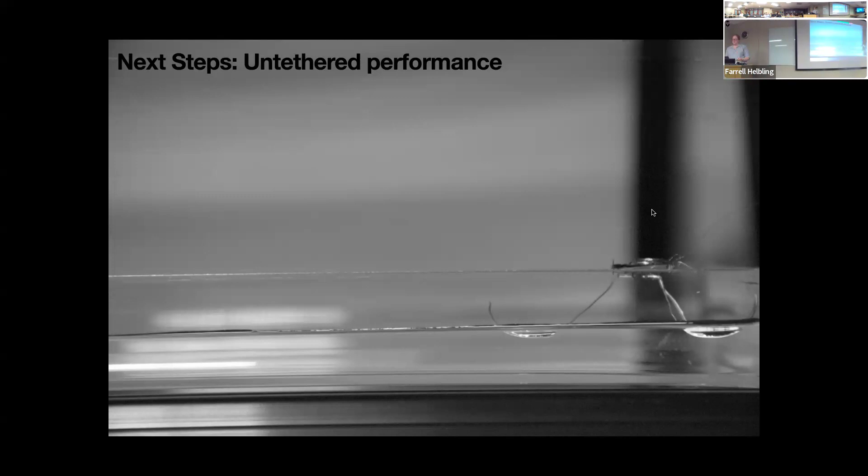So yeah, these are some of the cool new platforms that we've been developing.

Just kidding. I also like these tools because they're very interesting for external engagement. I worked with Mike at the Museum of Science in Boston. They finally killed this, this no longer exists. It's so sad. But it's also been at the Smithsonian, at different aeronautics spaces, the World Economic Forum. I had to do something for Facebook back when Facebook was still a thing.

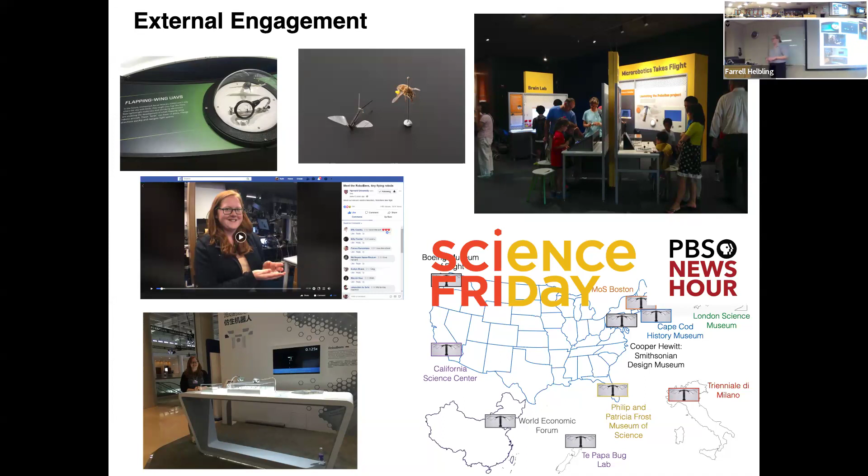Is there any advantage to having the wings close to the water versus further away? Yeah, so that's something that we're actually thinking about, because we can do a lot with ground effect studies. So Jane Wang is also at Cornell, and so we're doing some work with her to think about these, or hope to in the near future.

Is it better to be in the boundary layer or out of the boundary layer? I think that we could get interesting performance if we're within the boundary layer. But my initial inclination is we want to be outside of it, because then you can better control your performance, but not sure. Interesting physics happen that I don't fully comprehend as an engineer.

Why did you choose to track a reference pose for the bee instead of, let's say, a trajectory? Because you don't always need to hover as an insect. You can kind of track the trajectory instead of having to go from point to point.

Oh, interesting question. I think it was just to simplify it, and we always want to make sure that the vehicle is in upright orientation as much as possible, because if you pitch or roll too far away from your upright position, it's very easy to go unstable afterward. So it's just an easier way to stably move through the system.